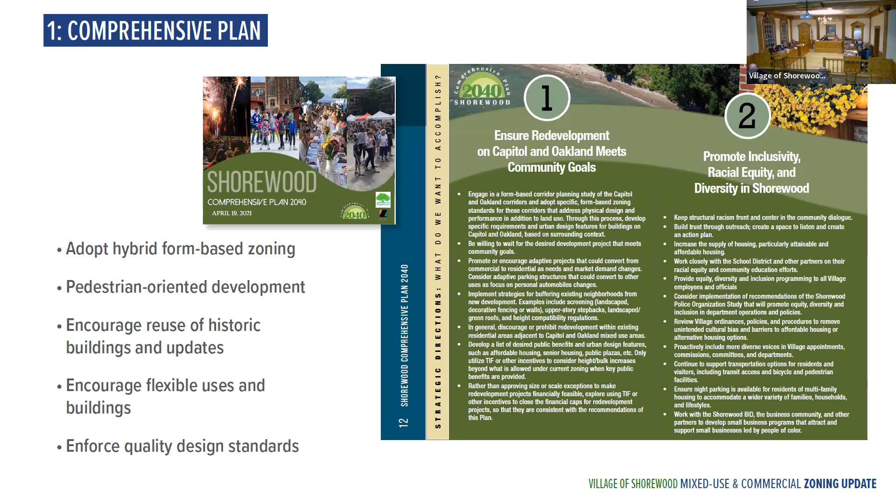So at any rate, the comprehensive plan, again, is very important. It creates a basis for writing the new zoning. It asks to write new zoning. And then it has supporting goals and objectives included in it that we followed.

The scope of work was very specifically the B zones that you have in your current code. Those are highlighted here—they're a majority of the parcels up and down Oakland Avenue and Capitol Drive. You can see the high school is not included in this, that the church on Capitol is not included in this. Any single family zoning is not included in this. So it is just the B zones.

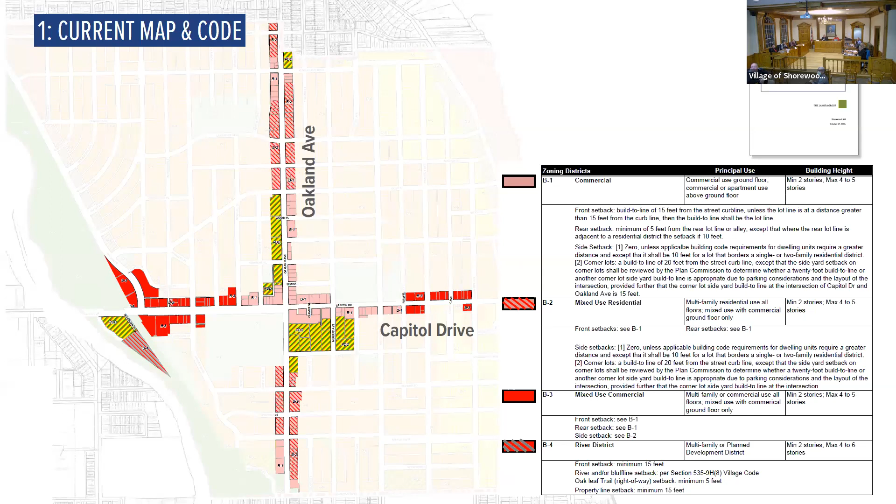There's actually a parcel up underneath my number 1 current map and code blue box up there at the top. And then you will also note that there are a couple of parcels along the Milwaukee River that are also included in this.

One of the key steps in phase 1 of the project were listening sessions. I had listening sessions with, I think, all of you and a lot more. Again, a first for me—the most listening sessions that I've ever had for a project, the most people involved, I should say, in listening sessions. And they were very helpful.

I think you saw them—Bart kind of outlined them in his memo to you. We met one-on-one. I think we offered to meet with all trustees, all commissioners, pretty much every committee that was involved, and also held a couple of group listening sessions with developers, architects, and designers that were really helpful and great to hear from.

This one-page 'what have we heard' is the expansion of the goals for the project, in my opinion. It's asking for clear, predictable regulations, simpler approval processes, high quality, appropriately scaled buildings, and affordable places for people to live. Part of that affordable places for people to live is all about a simpler, more predictable approval process, which can make developers more comfortable working with the village, but can also lower their costs in terms of review so that hopefully they can take that money and put it back into those high quality, more durable buildings.

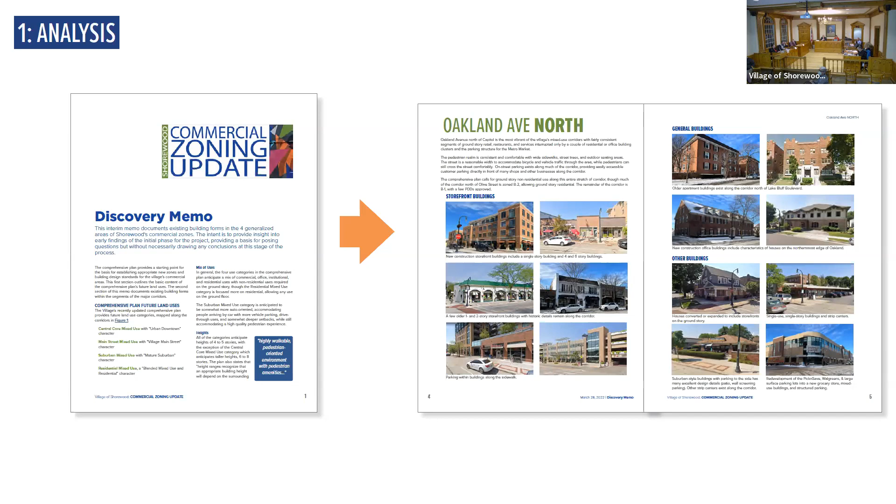From there we headed into phase two, the public outreach process. We held a first public workshop, which was an introduction to form-based code. The second meeting was remote because we were still in COVID lockdown, but the following meeting was in-person at the library, where we did an image preference survey.

These are the four categories of images we looked at. I want to draw your attention to categories one and two, which are two building types: storefront buildings and general buildings. We showed about 100 images, and everybody looked at and scored them, then discussed them, which gave us a lot of good information to fold back into the code. The storefront buildings and general buildings are two of the key building types in the code, which I'll show you in a few minutes.

The streetscape and facade renovation sections were really a reality check. They helped us talk a lot about the public realm in the streetscape section, and get a better feel for what people walking up and down these corridors would expect—I'll talk about that in a minute. Facade renovations were also a reality check; we wanted to make sure the code would work for renovations of facades, since there are so many beautiful existing buildings that get renovated that you'll want to retain.

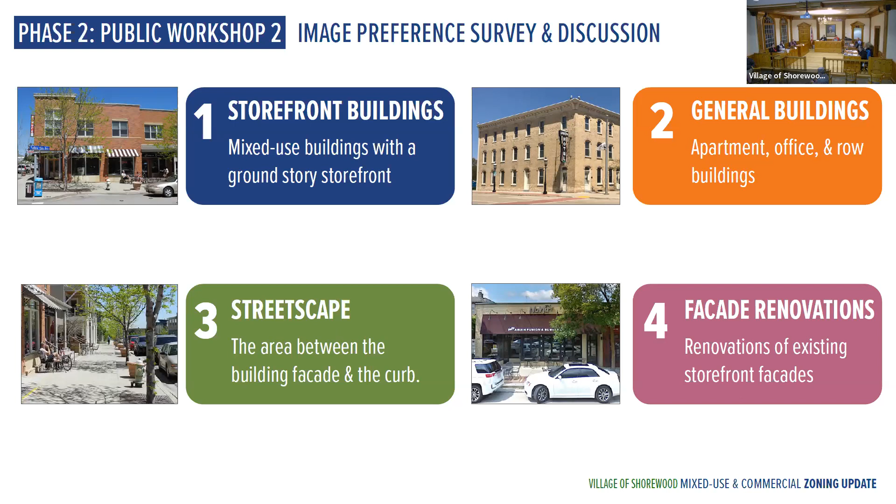The third public workshop took those building types and created a map with zoning districts. You really can't read anything from this, but this is one of the pages from one of the boards from the workshop. The idea was to get down on the ground and ask key questions about how different parcels should be zoned, which again helped reality-check where we were going.

One key element at this stage was getting buy-in that we really want to focus those storefronts—ground floor storefront glass with storefront-like uses like retail, restaurants, and services—those really active uses along specific portions of the corridors. Then, in the purple, lavender, and darker purple areas, and also the light blue, dark blue, and orange areas, we'd allow residential and office uses on the ground floor.

Part of the reason is that every place I've worked in the last 15 years is overzoned for commercial, as you all probably experienced at some point before your zoning changed with the different B zones. The idea is to consolidate all those storefronts together so they benefit from each other, creating little mini districts of activity. That's what we've done on the new map, and this workshop was largely about that discussion and getting buy-in on it.

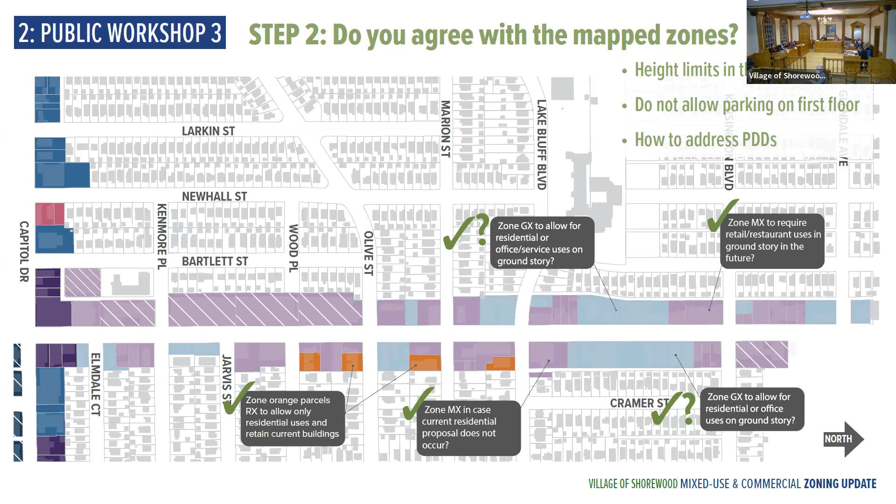Then we had further discussions with the working group. That was longer than I meant, but the idea was to give you the background of how we got to this public review draft.

Any questions so far, or no? I don't want to discourage anyone, especially members who weren't involved—if you have questions, this is a great time to ask, or for members of the public as well.

As I said, that last public workshop included the districts and the map. I'll quickly walk you through those districts and then show you the map, since zoning districts are the structure of the code with allowed building types within them. For the purple storefront areas, we defined three zones: two we call MX zones, MX1 and MX2, and the third is CX. All three are named with the word storefront in them because the main building type for those locations is ground floor storefronts.

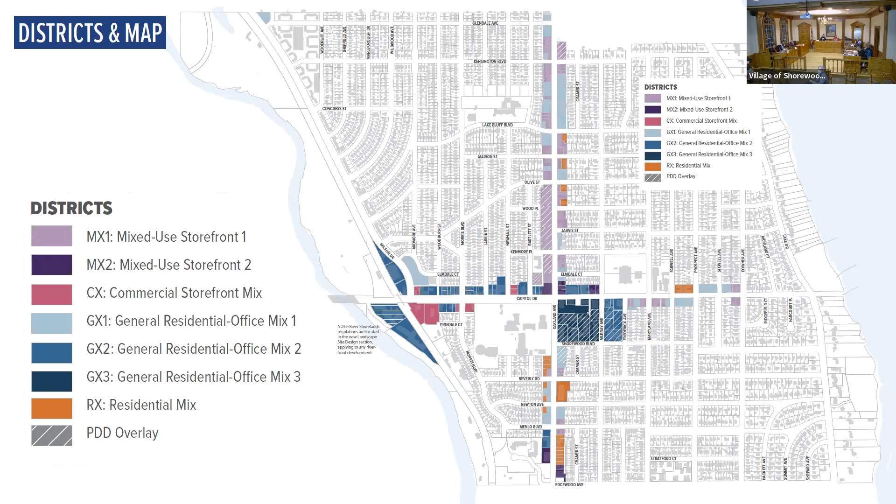Another item to notice on this map is that the PDD is now hatched over all of the existing locations as a PDD overlay.

This is not in your packet because what we will be doing is, for lack of a better term, a scrub of the current regulations, and this will get folded in as text within the regulations, but the working group has seen this. So this is the language to take those PDDs that are on the books right now and turn them into what Kirk calls the legacy district status, which means they become an overlay on top of the base zoning that we've applied. In general, we're not losing anything.

Very few of the PDDs, unlike most places, have design standards in them. They may have a few little adjustments, waivers, or modifications that were granted, but very few of those are different from what the code we're proposing says.

So I think this is a very comfortable way to carry forward all of the other kind of management language that might be in those PDDs, while keeping them from expanding, and also if some significant change happens to those, then they would use the new base zoning.

So we've gone to all this trouble to create this new code, and the code would then apply. So if something got torn down, that's a PDD right now. So that's PDDs, not my favorite topic.

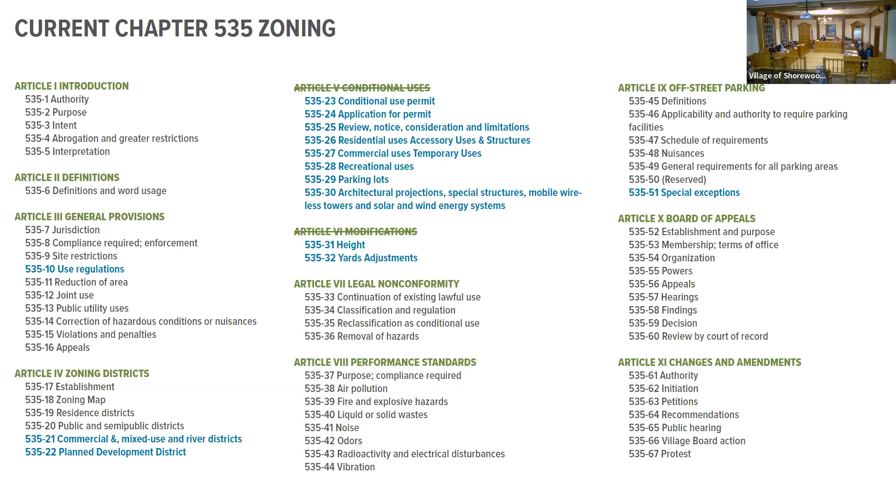This was like surgery. And what we're doing - I'm going to show you in just a second - is we're replacing that Article 5 conditional uses with another use section. I'm sorry, I'm not talking into this, am I? Okay, so you can see that.

What I'm doing is creating 3 new articles nestled in the middle of that. And again, this is all information the working group has seen. It just maybe sounds a little bit different presented this way.

Article 5 uses is a new article we're introducing in place of your conditional uses article. The idea is, instead of just having that one little nestled subsection on uses, we're creating an article about the uses, so all the information about uses is in one place. And that will apply to everything. We haven't changed any of the regulations, but it will apply to everything, and it's a little bit easier to read and understand, I think.

And then also in terms of procedures, you notice I had taken special exceptions out of parking. We had the conditional use section, and then in the building code section there was information about design review. So we've taken all of that and consolidated it, creating this procedures article, and I'll show you that in just a minute.

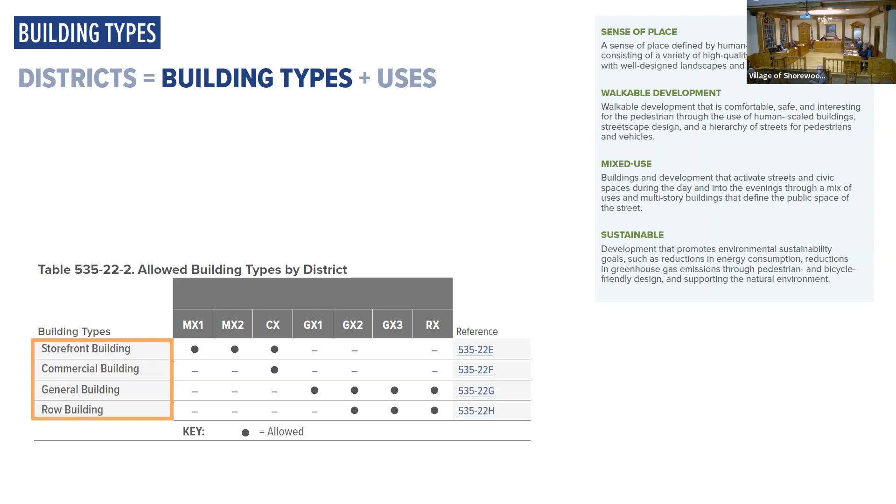And those are just the intent language up there on this side. I'm gonna skip, you can read that. It's very consistent with what we've heard.

Each building type, the 4 building types, is regulated by 6 pages. Every one of them is formatted the same way. The first page is a description and intent, and it has images from the image preference survey.

And I just realized, Scott, that we did not change out one of the images that you requested. Was it you that requested to change it? So we'll need to do that.

Description and intent, building siting is number 2, and parking siting is number 3, page 3. Height, building height is page 4, and facade requirements is page 5. And again, if you remember public realm, the facade requirements are all about the primary facade, windows and doors, and divisions. It's a very simple set of regulations associated with those. And then page 6 is about supplemental regulations.

So I'll explain this in just a minute, but we have some facade variation that we've incorporated that was specific to a lot of our discussions within the working group, as well as in the public workshops, about having more variety to our street wall as opposed to just a straight shot street wall. And that is all located in that supplemental regs section.

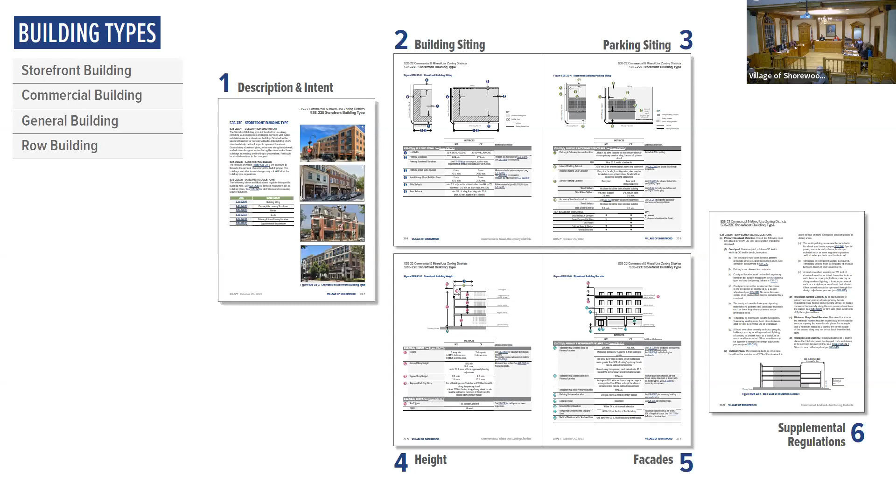So this is just to... I'm not going to go over any of those pages with you. You can read them and look at them, but just to kind of point out, within building siting, those hatches are build-to zones. Your current code has a build-to line, which would result in that sort of straight shot street wall, which is not really typical of the character of Shorewood.

You've got a lot more push and pull in areas, spaces, along the facade. And so a build-to zone allows for that. So that hatched area is our build-to zone, which is pretty broad for a kind of sort of urban-like code.

In terms of parking siting, we are requiring that the dot screen that you see there on top of the building means that parking can be located in the building a minimum of 20 feet from the front facade.

So there has to be active space in there, and that really helps to make sure that sidewalk pedestrian area is comfortable to people, and you're not walking along the fronts of cars or lights or activities. Like a lot of open facades are really uncomfortable to walk in front of. You guys have done a great job with the ones that you have. But it also shows where the parking can be located on the site.

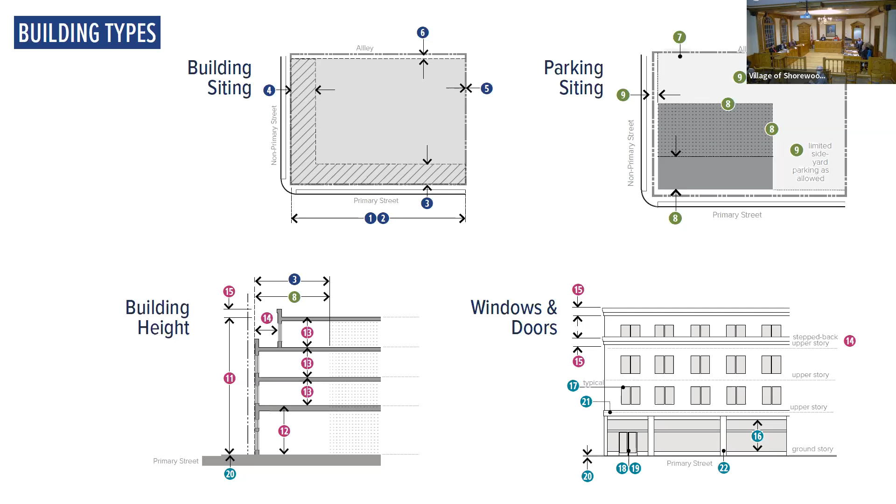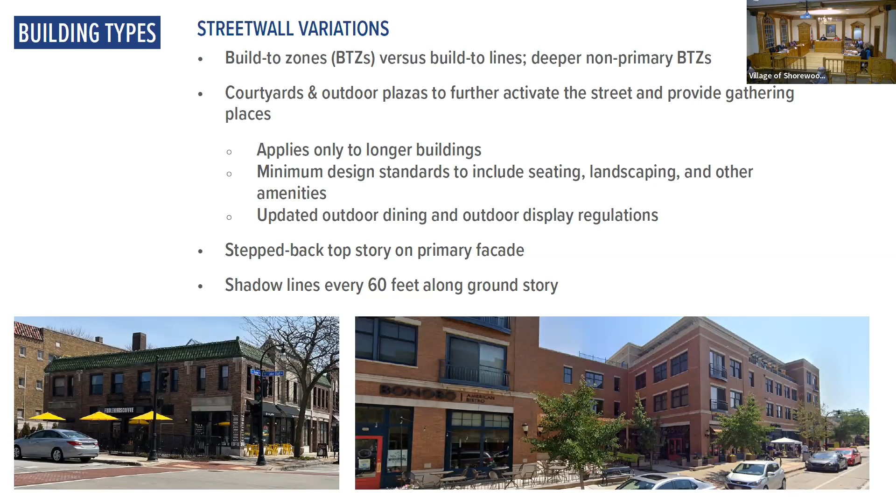And then the side patio on Fiddleheads, we referred to quite a bit. So we very specifically wrote the code so that on longer buildings, you require either a courtyard similar to that one, fairly small, a little bit smaller than that one, or an outdoor plaza, meaning you use the maximum build-to zone to put an open space along 50% of that front facade. So again, we're trying to get a little bit more push and pull and not just a straight shot street wall.

And then to talk a little bit about those street frontages, you'll see in the code primary and non-primary street priorities. So we've defined Oakland and Capitol as both primary streets. Those are going to be the fronts of those buildings. But at the intersection of Capitol and Oakland, we defined that Oakland is primary over Capitol because those buildings actually have sides to Capitol. It doesn't mean there's not still street frontages. They still have requirements associated with them, but it's just a little bit lower than the primary street. So we're trying to balance our priorities again.

We also have identified some locations where there's not quite a wide enough sidewalk compared to other areas within the village. So we have this expanded streetscape requirement called minimum streetscape area in the code. That means that if something were to redevelop, say where the AT&T big blank building is, they would have to push back a little bit to make sure there's enough sidewalk in that location. That doesn't really apply to very many places in Shorewood, but in terms of transitions at our districts, that was something we talked a lot about.

We have a step back story above the third floor when a parcel directly abuts an R district. In the back, we have rear and side buffers built in for vehicular areas, which is not very different from what you currently do. And then in terms of outdoor dining, like on rooftop terraces, we've said that they can't occur when they abut R districts.

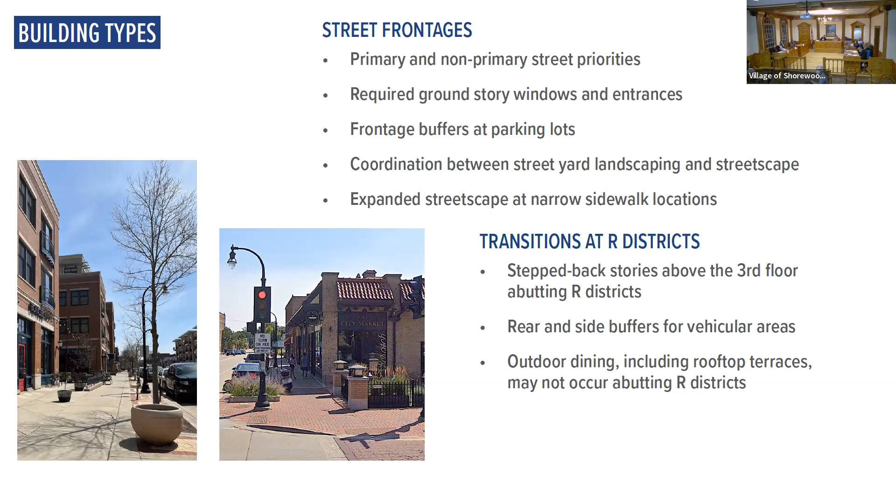Facade elements, and Chuck, can you stand up? We have bird-friendly design in section 535-23F. I just want to talk about facade materials, facade elements briefly. Facade elements are things like windows and awnings and balconies, and making sure that the window glass is open and not blocked up by a display, which we have seen. But bird-friendly design is a small, short section. It is modeled after Madison's regulations, and there are some reasons for that. First of all, Madison is in Wisconsin, which is really important. The Madison regulations have gone to court, so hopefully they can withstand that type of situation.

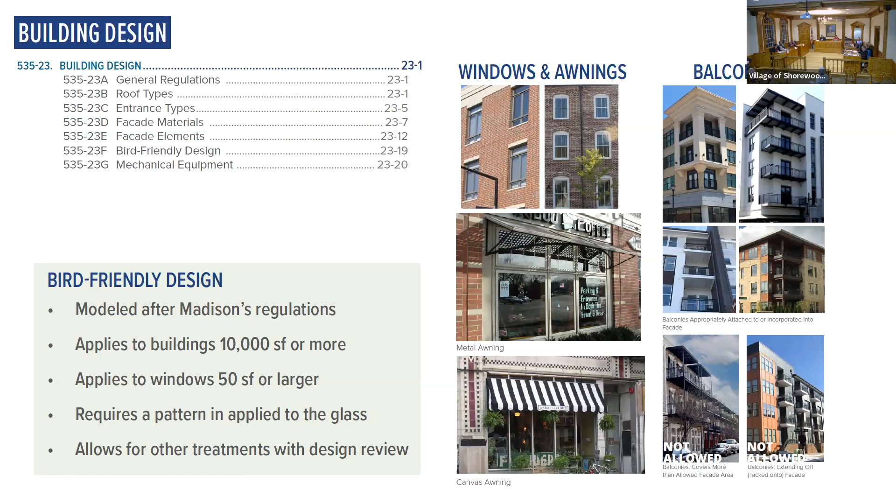Okay, so one of the most important sections in building design is building materials. We very carefully had a lot of discussion about materials. We have defined major materials and minor materials. The major materials list is very short - that's what you see on the left-hand side. It's basically brick, high quality concrete masonry units, and stone. So it is high quality. Most buildings are likely going to be brick, although the CMU option, the concrete masonry units option, is a good one, and I've seen it used very well.

Minor facade materials, you can see the list on the right-hand side. You can't read it, but it's a longer list, and it is to allow for a lot of flexibility in terms of that part of the design. The percentages are 65 and 35, and we've asked to use just one major material on the majority of the building, so that you're not getting these really complicated facades. So I'd encourage you to take a look at the list of materials.

For the most part, your new buildings are not using the minor materials, but there are some that have been used, and there is in fact a prohibited material that has been used. The prohibited list is a very short list, and it is mostly about durability. One of the things to keep in mind - I'm going to explain about adjustments - but you can ask to use any material that's on the minor material list, or any other material as long as it's not on the prohibited list, as a major material with design review.

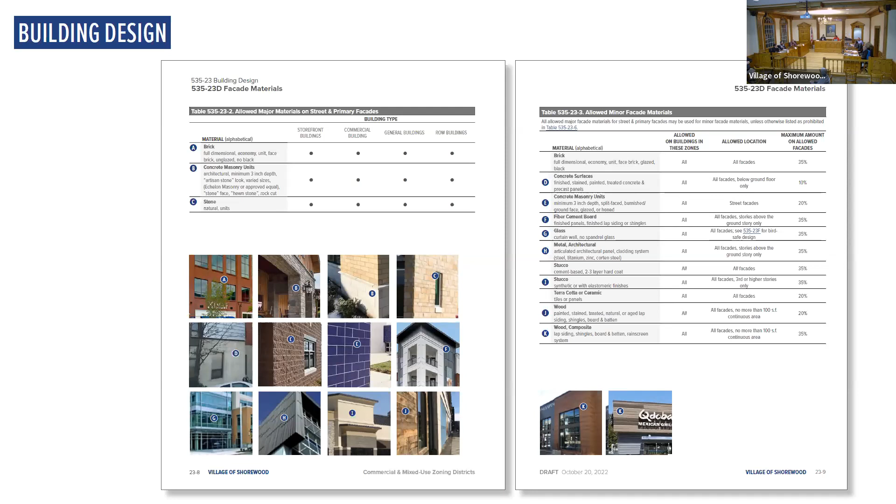So the last section in the zoning districts is 535-24. It's about landscape and site design. I'm not going to talk a lot about this because you guys already do the most important part, which is streetscape. Since that's village installed, what we're mainly focused on here are the buffers - the frontage buffers where you have vehicular areas along streets. Parking lot buffers - parking lot landscape isn't going to happen that often here. And then rear and side buffers are going to be really of limited use.

So one aspect of this section is all of those courtyards and outdoor plazas that we talked about. We have some minimum standards that are pretty straightforward to provide temporary or permanent seating in those, one or the other, and then a very small amount of landscape area within those plazas.

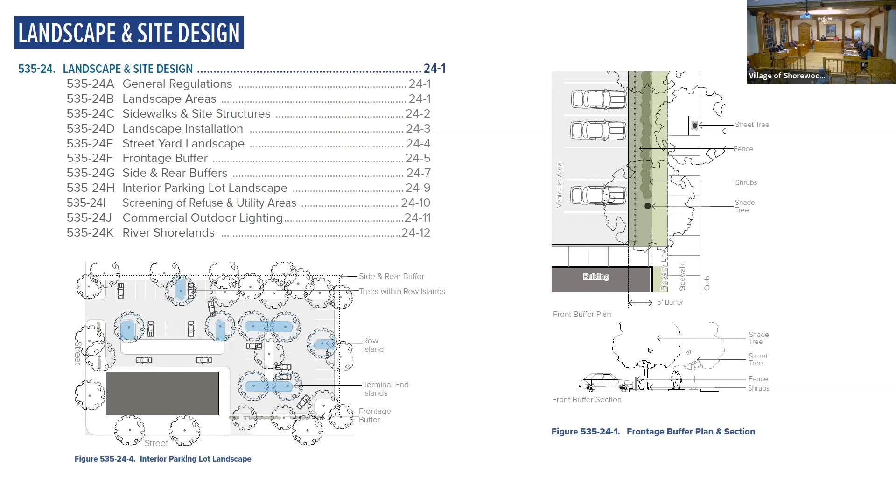Okay, that was zoning districts. Any questions? Let me go on. Questions?

Okay, I do have some questions. Oh, okay. Is this the appropriate time? Sure, if it's about zoning districts. I think so.

So there wasn't any reduction in conditional uses with this. Has anything changed there? Never mind, okay.

The building to zone versus building to line. So the zone is discretionary? No, let me explain the difference.

Sure. So the build to line is measured, I think you guys measure it 15 feet off the back of curb, is that right? The build to zone is measured from the property line, and it depends. On the storefront, it's 0 to 20 feet, and it's defined in the building siting section. For the general building, it's either 5 or 10 feet, depending on which GX zone you're in, and set back, I think 25 or 30 feet.

So that sort of 20 to 30 foot section, most people are likely going to use the narrower one, which is why we put in the facade variation, because your parcels are so shallow. But that does allow you to go back and forth. It is a zone that's defined by a minimum setback and a maximum setback.

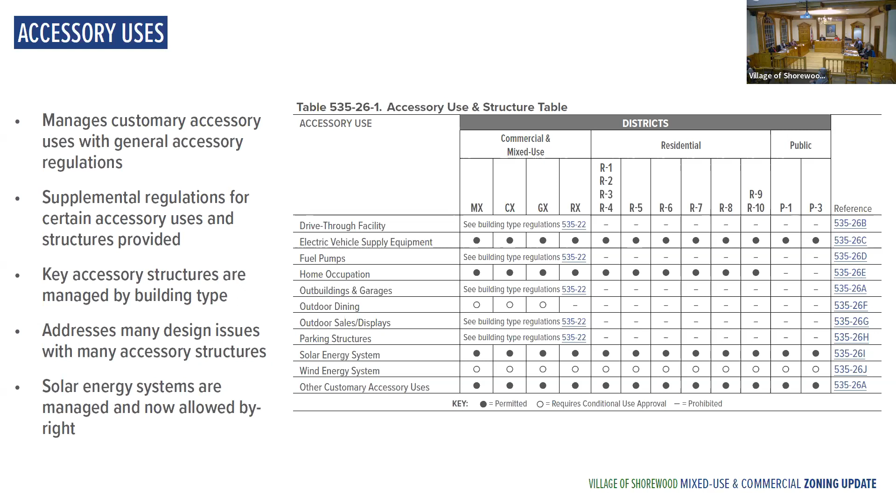Other customary accessory uses—anything customary is clearly outlined as to how it would be defined as a customary accessory use, and there has to be a principal use associated with it. It would then be allowed in any zone if it's customary to that use, and there are definitions about where it can occur, mostly in the rear.

There is also a temporary use section in that article, which basically follows your current approach, but I think it defines the amount of time that some of those temporary uses can occur a little bit differently.

Procedures is really important section. We had a lot of discussions about how projects are reviewed, and what we did was try to line out how you're currently reviewing things and create separate sections that outline them. So you can see we have a project review application section, zoning review, design review. Some of this is a little bit different for the working group because we've fleshed it out a little bit more.

And then we have two adjustment types that I've been referring to. We have a planning adjustment type and a design adjustment. The planning adjustment is for the Plan Commission to review and approve, and the design adjustment is for the Design Review Board to review and approve.

The planning adjustment is a sort of minor dimensional relief, 10% or up to 1 foot, to all of the building type regulations. So when I had a little bit of hesitation about the build-to zone, 10% or 1 foot could get a planning adjustment. So that's a minor one. I will say that usually those minor planning adjustments are zoning administrator approved because they're so minor.

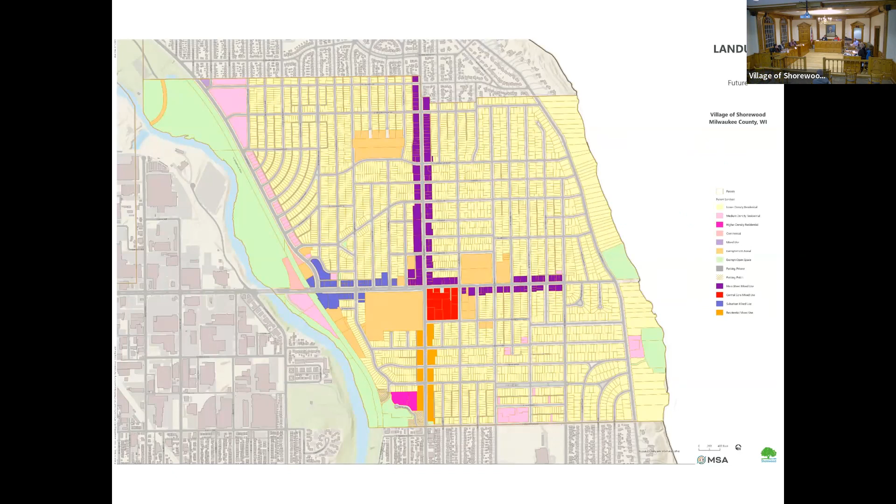Okay, now you can see a map. Yeah, I can see the land use map now. Okay, sorry about that, I didn't realize the slides weren't advancing. So this is the current future land use map in the comprehensive plan, showing much more grouped blocks of coloring. The purple is Main Street mixed use district, the orange below is residential, and the blue on the west end of town would be more suburban auto-centric commercial uses.

So the comprehensive plan had these more general uses, but the draft we're working with for the commercial zoning update has more nuanced versions with nodes of commercial activity, but the blue sections don't require commercial ground floor uses. So these blue areas would need to be updated, because the narrative descriptions on pages 173-174 each have a description, and in the final sentence of the Main Street mixed use district, same as the central core and suburban mixed use district, it says ground floor non-residential development is required. If the community is in line with the commercial zoning update, we'd look to remove this, understanding the recommended zoning part says changes to existing zoning districts and/or form-based standards are envisioned. We'd be adopting those form-based standards, which don't necessarily require that ground floor non-residential.

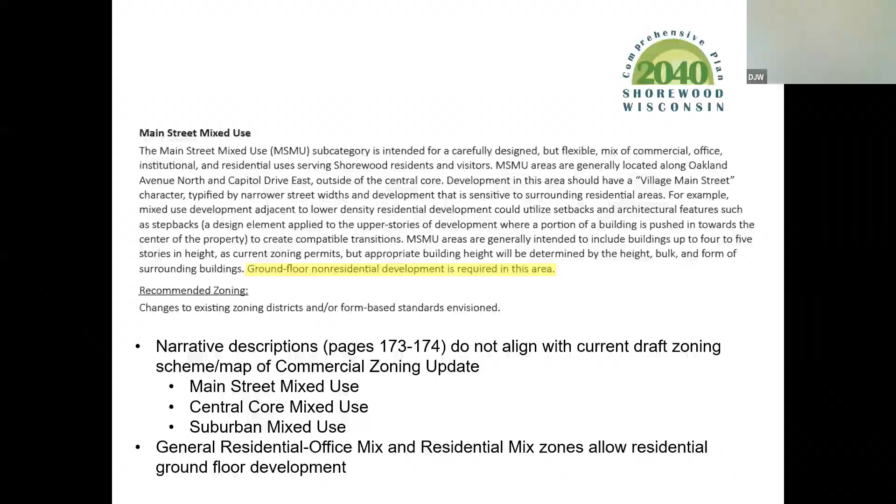So once again, this was explained throughout the update process, but these sentences in these three sections would need to be either amended or removed in order to adopt the plan as drafted today. There were lots of districts I want to spend more time looking at, those GX districts. Not that what I say ever goes anywhere, but my understanding is that there is still quite a bit of requirement, even in those blue areas, that the ground floor area be—in the district plan, in these blue areas—a commercial use.

Or is that completely wrong? In any of these dark blue and blue areas, the commercial floor, the first floor does not need to be commercial use? It could be fully residential or fully office. It would not need to be a storefront commercial use.

But the parking can't be on the ground floor. Correct, within 20 feet of the front of the building. And does that primary facade in that 20 feet, does that also apply to corner buildings, both streets, or would it only apply to the primary facade? That 20 feet? Just the primary facade.

Yeah. And is there any demonstration of what would go in those spaces and how usable those spaces would be if we create 20-foot spaces in the front of the buildings?

I'll defer to Leslie on that. So it's minimum 20 feet, and again, it can be any of the allowed uses in the ground floor. So I understand, but here's my question: are there models, are there buildings and uses that will fit within 20 feet of depth?

Yes, absolutely. I will say that I used to do 30 feet, because that was the size of a residential unit. But as residential units have gotten smaller, as well as retail units have gotten smaller, we sort of switched to that minimum 20 feet. It also allows for a little bit more flexibility in the building form.

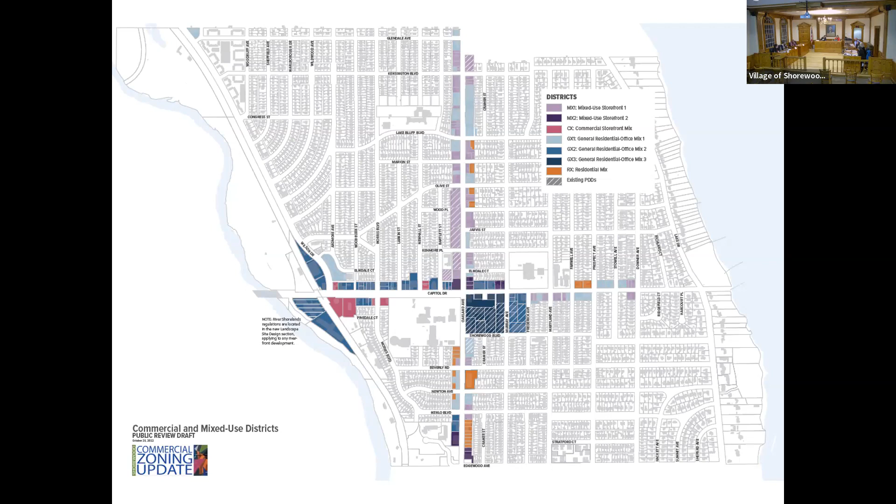Anyone else? Oh, Barbara Kylie Miller. When I think about those smaller retail spaces, I think about some of those buildings just west of Oakland on Capitol, like the surf shop or the shoe shop next to it, or maybe they're a startup company and they can't afford or don't want to have that larger retail space. So I think it's good for the village to offer a variety, because then you're going to get more variety of businesses.

Thank you. Any other members of the public who would like to be heard? All right, I think that concludes this agenda item.